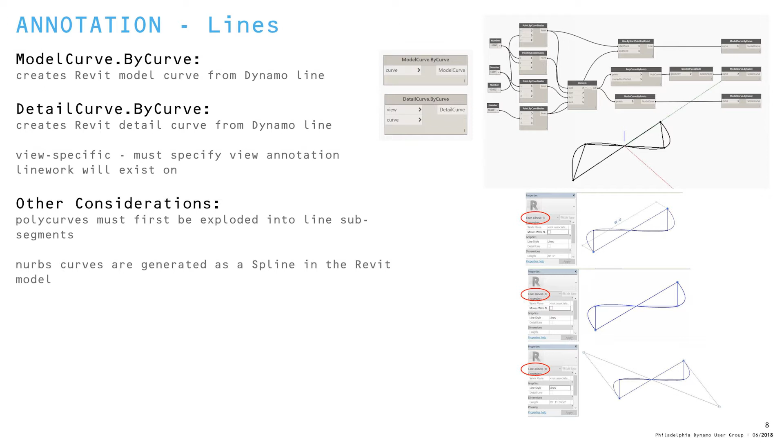Another thing is filled regions. Sometimes we want to drop a hatch or mark something up with a filled region, even though they're not the most intelligent elements in Revit. You can take Dynamo curves like a poly curve and then the perimeter lines of that and then establish a filled region in Revit.

One thing to note is these are view specific, so if you hover around here, you should be able to see. So you have to define the view that you're trying to put it in, up here. So I've done some kind of filter by Boolean mask and matching to get this level 2 floor plan. Otherwise, it won't be able to be placed because that's a view specific item.

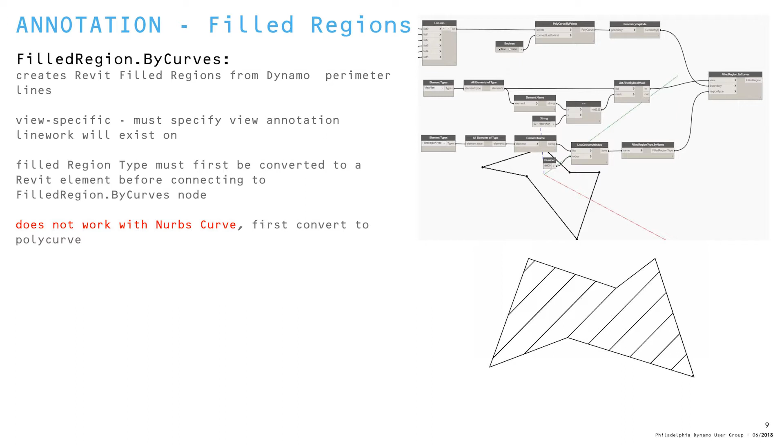It does not work with NURBS curves. That's one more point to note, is that you have to do the same kind of workflow or another workflow we're going to see in a minute about converting it to a poly curve so that Revit can understand it.

Another thing that you can do is place 3D components or families into Revit in any place. So I just took a simple example here and a point array and placed a bunch of trees. This one's really simple. I took a handful of nodes, obviously, but this could be helpful for placing furniture items and all kinds of different things.

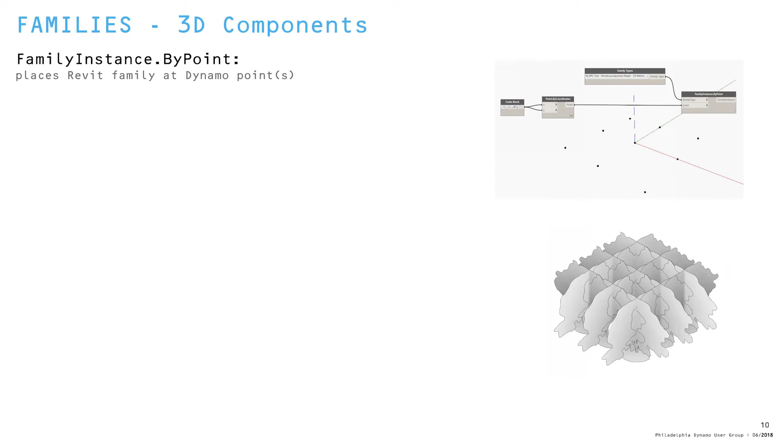Another one is hosted elements like doors and windows, even face-based or surface-based, ceiling, floor-based stuff as well can work. So what you have to essentially do is define a point that you want to place it on. In the workflow that you see here, I actually selected a Revit element. So I'd created a wall on the Revit side and then pulled that into Dynamo.

Up in the left corner of this workflow, one of my favorite ways of getting information from Revit is the select model element button, which I'm hovering over. That will pull in the actual element itself, and that's evidenced by the Revit element ID that pops up with it. However, if you share this file with somebody else or you open it at a later time or in a different model, it may not have that specific element ID, and it sure as heck won't match that same wall or whatever item you're querying from the model.

So I use our archi-lab select by element ID node, which allows me to bake in an element number. And in the future, if I switch models, let's say, I can select a new wall and feed in a different element ID number, and then it will select that every time. So that's a little more robust than the out-of-the-box select model element node.

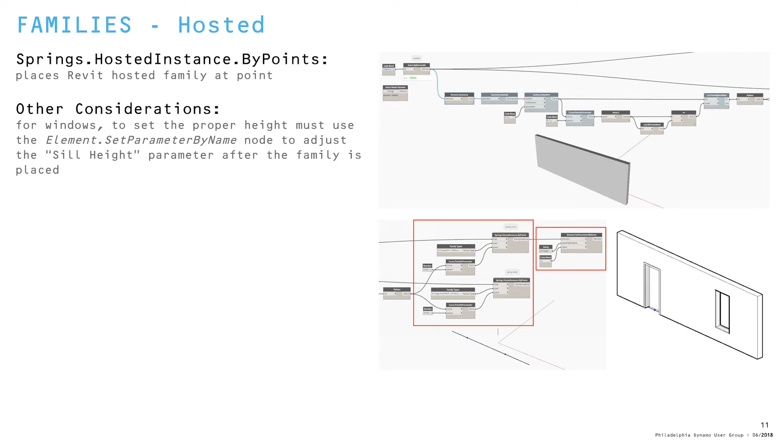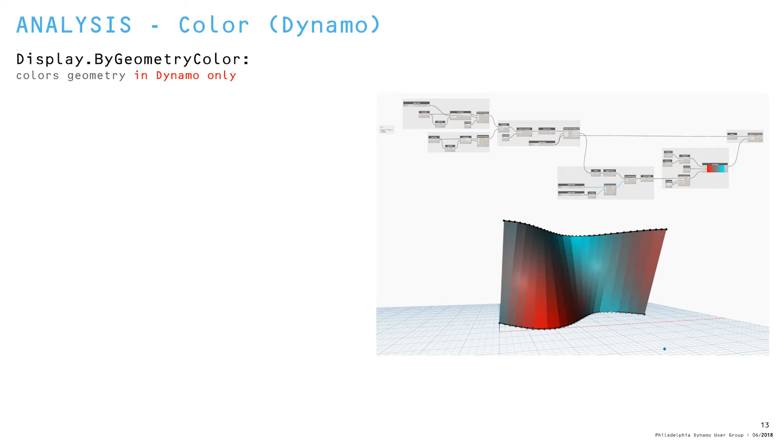On the Dynamo side, you can do some pretty neat things with color as far as analysis goes. This is geometry from a Dynamo workshop I taught at Dynamo-litia a couple years ago now. It's essentially just analyzing the perpendicular vector direction coming off the face of these panels on this wall. But this, using Display.ByGeometryColor, only shows in Dynamo. So that's only helpful for what you're doing on the Dynamo side. It doesn't actually get it to Revit. So how can we get color in Revit?

Using Element.OverrideColorInView, we can do a hack and override the color in the specific view we're looking at. In this case, I placed a bunch of generic family boxes in an array, and then colored them in that fashion. One thing to note is I have a little bit of logic going on here: I took the total count of items, and then using the remap range, I had to adjust for minimum and maximum color values and feed that into the color range node, which creates a spectrum, kind of a rainbow color, and then applies that over, let's see, 16 families here. So you can see that gradient shift over the course of all those shapes.

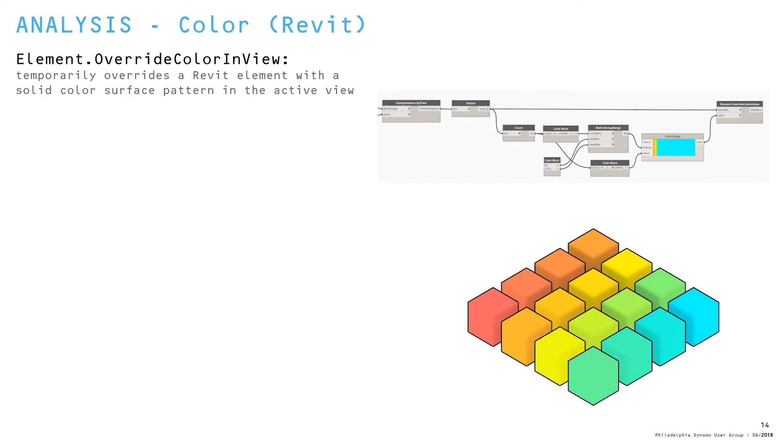Obviously, override color in view is a little bit of a hack at times. If you go into Revit, into plan, and right-click on any item, you can override it there. But it is a little bit tricky because it's not an ironclad way to alter something's characteristics or its visibility settings. And it makes it tough for a team member or yourself to figure out how that item got colored later. So that being said, there's another way to do it with materials.

You can use the same Element.SetParameterByName that we've seen with driving, say, dimensions of a certain family or object. But in this case, we're going to query an existing material from the Revit model. We're going to use Material.ByName and feed a string name into it, and it will create an actual Revit element that recognizes a preset material that I've created on the Revit side. In this case, I just named one red, put in the appearance values and all that, and then was able to drive that as a material parameter into the model and overwrite these families.

One thing to note is that I tried doing this on a material type parameter, and it was not happy. So it's important to make it an instance parameter so that it affects one family at a time, and then make sure you have all the families selected on the Dynamo side in order to color all of them the same. Or you can start to do something similar to the last workflow. All these colors would need to be pre-loaded into your Revit project in order to then match them up and drive them through Dynamo and SetParameterByName.

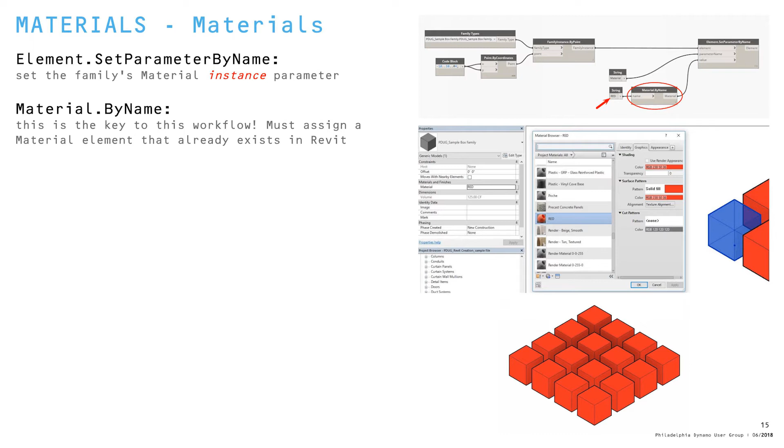So then looking at something like walls, pretty simple. The way walls are created in Revit is very similar to the way that you manually create them in the software. You click on a point and then drag a line and define what your wall is and set an offset height, and then that's what generates the element.

In this case, there's a tool called wall by curve and height. And if you have a Dynamo curve that you've created, so here we have 2 points and a simple line between the two, you can use the wall by curve and height node to set what the total height of that is, what your start level is, and the type of wall that you want, and it will generate that.

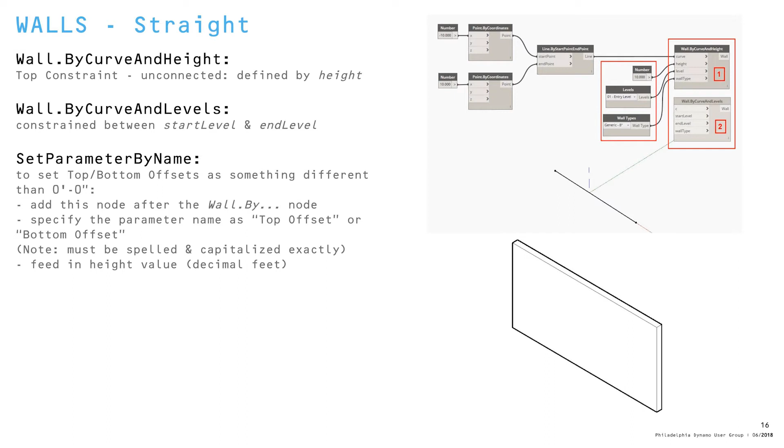There's also another node called wall by curve and levels, and the only difference with this one, instead of an unconstrained height, you can define 2 level inputs, and it will constrain that wall between, say, level 1 and level 2. Using the set parameter by name, it is helpful if you decide you want to change offsets of something. If you have a real specific, like a parapet wall at the top of a building or something, you can then make sure that it's constrained between 2 levels and then start to adjust the heights of the offsets for that upper and bottom portion.

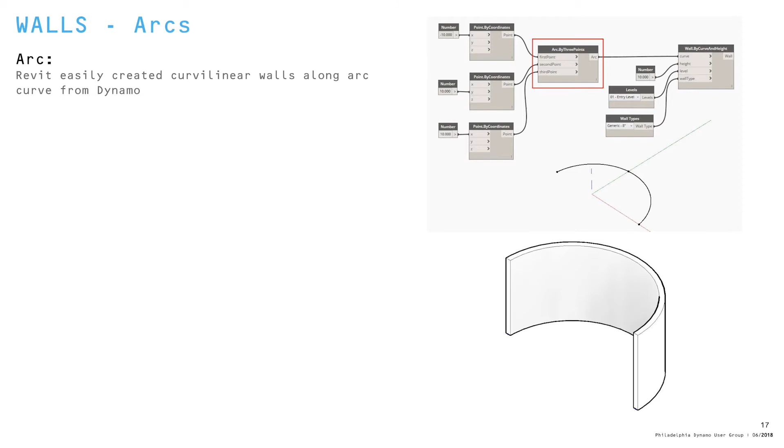You can also do arced walls. So what's nice is, you can create this on the Revit side, but it's interesting to be able to make curvilinear walls driven from Dynamo. So up here, we just have a simple arc by 3 points, and then it's feeding in the unconstrained height version of the wall by curve and height.

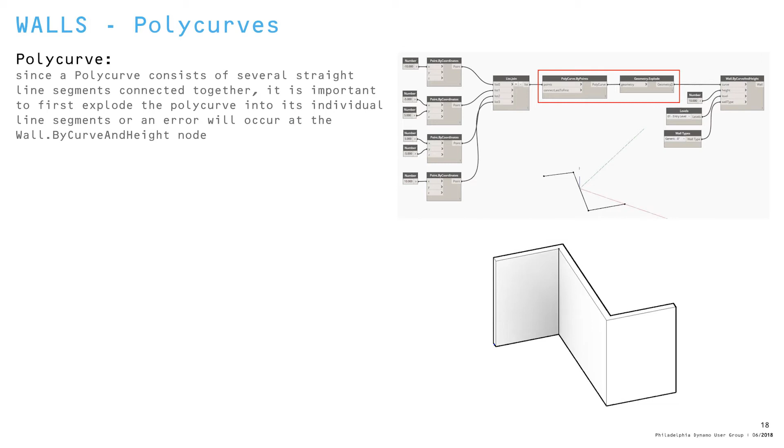You can also use polycurves. So just using some geometric logic here up in the example window, I was able to create a polycurve. It's kind of a Z. The key here is that you must explode the polycurve first. So these walls want to be created by individual line segments, not a series of joined line segments, which is what a polycurve is. So one step in between, I had to explode them, and then you could still give them the same wall by curve and height, unconstrained, define height, whatever, to get whatever shape you want, and they will join.

And then also, I took a shot at a NURBS curve wall. So I did not think this would work, and sure enough, it did not. However, there are ways to get a representation that's pretty close. And so you cannot create a spline on the Revit side, or a wall from a spline on the Revit side either. So that's just not going to happen, but you can with these smaller segments.

So what I do is, one of my favorite nodes is curve or surface point at parameter, in this case curve. What it allows you to do is feed in a sequence, in this case between the very start parameter, which is 0, and the very end, which is 1. You can define a number of segments along that line that you want to break it into. So here I have 10 segments if you count them off on screen, and it creates a new polycurve by connecting dot to dot to dot all the way to the end. And then I can explode that freshly created polycurve and use that to create my wall.

Obviously, visually, this isn't the smoothest thing. So there's a balance that can be struck between breaking this thing into more segments to make it look more curvilinear. If you have a handful of segments, it looks too rigid like this. If you have too many segments, it still may or may not look great. But also, if you get a million wall slivers, it gets a little difficult to manage because you're adding more geometry to Revit, and it's things that could potentially get moved or deleted or something like that. So keeping those elements together is important.

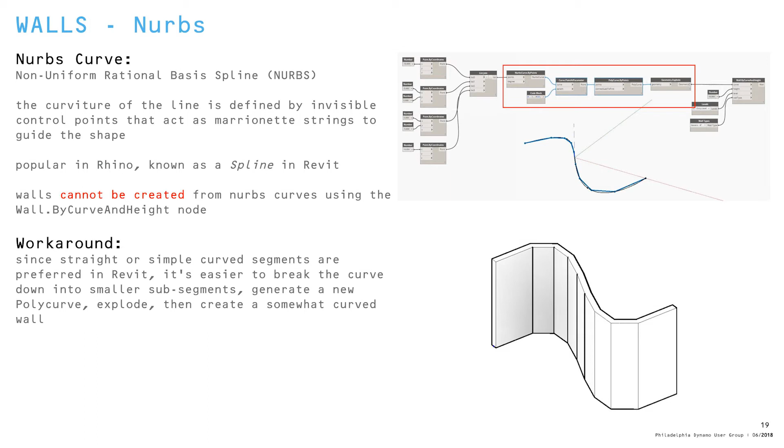Another option you have is to do wall by face. So this one's a little tricky because it depends on a Revit mass. So that's how the tool works in Revit itself, is you create a building massing, some sort of shape, and import that massing family into your Revit project.

One last note on that is one of my favorite ways to create kind of generic objects in Revit is using the Spring Nodes, Springs.FamilyInstance.ByGeometry. And what this allows you to do essentially, rather than an import instance or an SAT or some of the cruder ways of getting an element into Revit from Dynamo and other means, this allows you to actually use the Revit family templates that kind of come out of the box for generic models, special equipment, all kinds of different things.

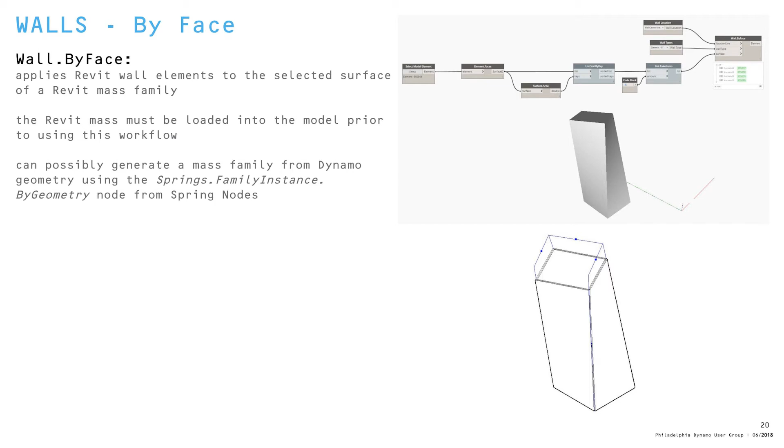So then I ventured into kind of floor territory. So similar to walls, floors are pretty simple. You get an outline curve and then just feed that into Floor.ByOutlineTypeAndLevel, defining what type of floor you want and the level it lives on.

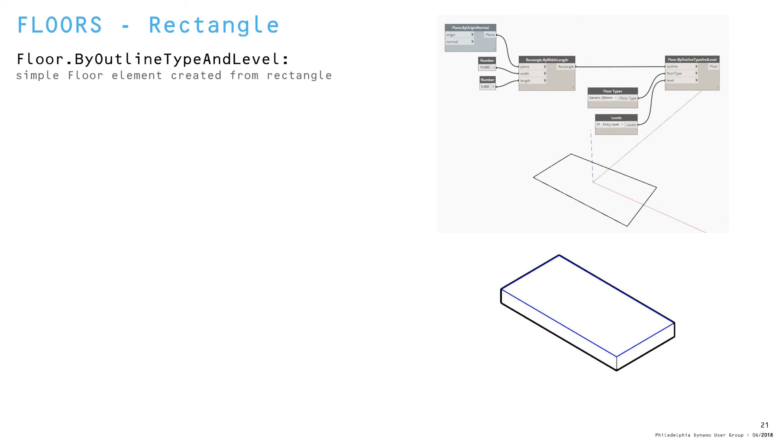To take it a step further, you can kind of pull in different individual curves. So say I chose a rectangle in this shape, but say you have a kind of wacky customized shape of some sort that you've been piecing together using Dynamo geometry logic. As a test, what I did was I joined the four sides of a rectangle, and then I shuffled their order to see if it would still be able to recognize and create that item.

And sure enough, with the individual curves in a shuffled order, it was still able to generate the floor. So it's not important that they're in sequential order. Probably a good idea as a practice because Dynamo often wants geometry to be in a nice kind of circular or ordered format in order to make its geometry. But if you're working on something that's getting a little out of control, but it still defines an enclosed shape, then you should be fine.

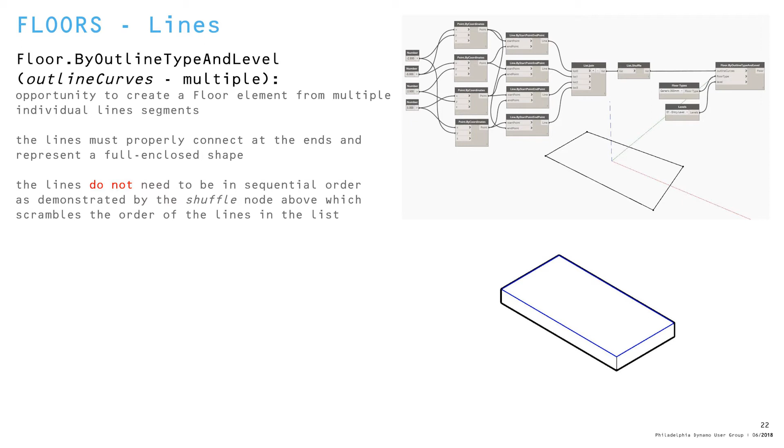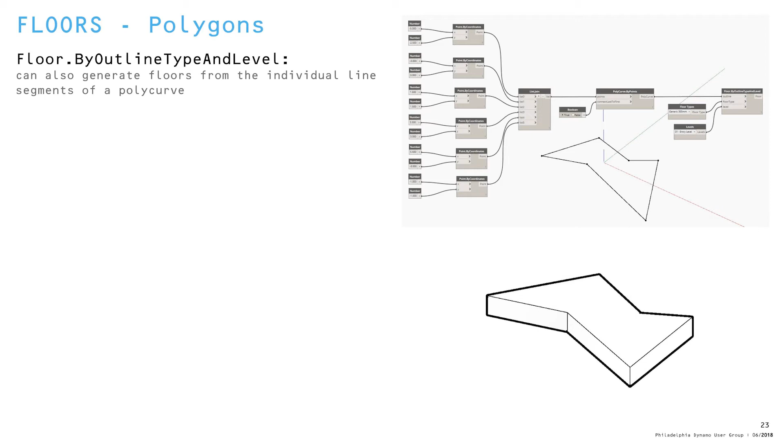Same goes for polygons. So I created this Z shape, whatever it is, with polygons, and then I was able to take that polycurve and feed it into Floor.ByOutlineTypeAndLevel, define the family type that it is, and then tell it what level it'd be on, and it made that shape.

Revit spline does not allow you to actually reconnect itself to the end. There's no snapping function in order to close that shape out. So no matter how many times you click and try to match it up or move it around, it just won't connect. It can be a little frustrating.

So the workaround for that is to actually leave it a little bit open, and you can draw a straight line segment to enclose that piece. And that will allow you to actually generate a floor in Revit, and that will work.

So a little bit about that background. I kind of just figured that out by messing around, but a little bit of background on why the Revit tools won't allow you to create a Revit floor from the spline is covered in Paul Wintour's Parametric Monkey blog that I found online. I thought it was absolutely fascinating, some of the limitations of that tool.

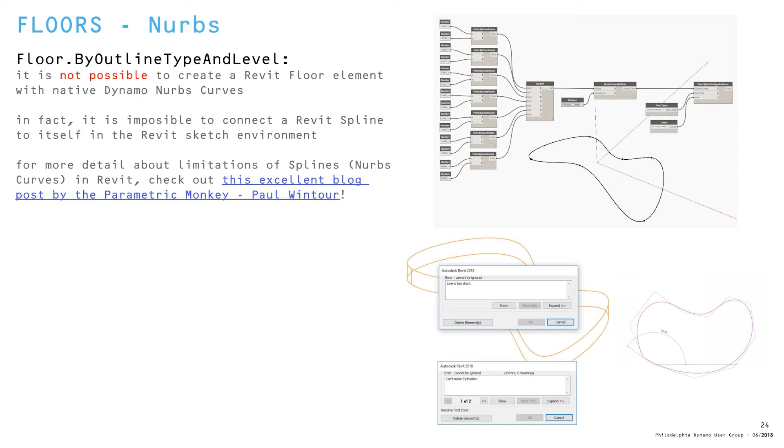So what I did on the Dynamo side was create a fully enclosed NURBS curve that I'm going to feed into a floor element, but in this case, just trim the end of this thing back a little bit so that I can enclose it by connecting a straight curve segment and actually make this all one enclosed shape. It's just not a true NURBS element. And once I did that, I was able to feed that into Dynamo, and sure enough, it worked.

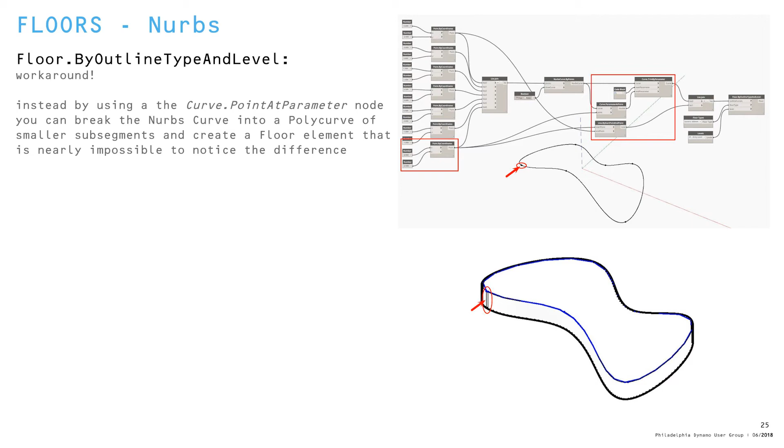And all you get is just one little blemish on whatever corner. So maybe you strategically try to hide that thing, but two little lines over the overall shape is pretty not noticeable. So then the next step, trying to take a crack at ceilings. This is something that I have tried many times in the past for different projects I've worked on.

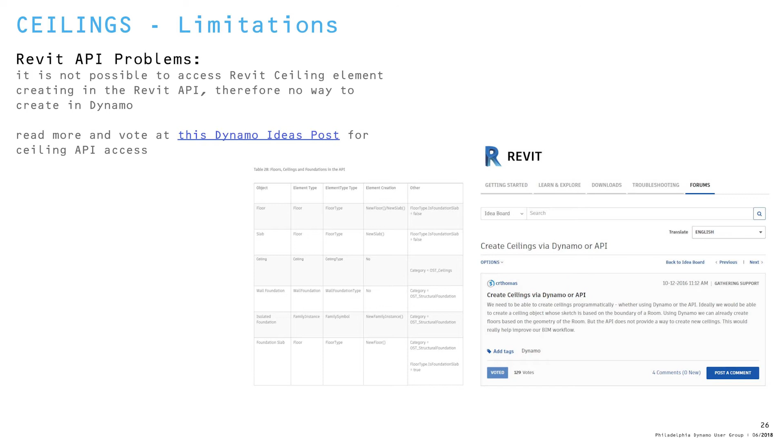With that being said, I have come up with two workarounds that allow you to circumvent that limitation. The first one was I just created the same poly curve that we were using earlier, and in this case I want to generate it as the ceiling instead of a floor. So using the Clockwork selection set by elements, you can actually import these curves in Dynamo as model curves in the Revit model.

The problem being that if you're on a project floor plan that's got a lot of stuff going on, a lot of annotation, you don't necessarily want to be importing curves into space and then potentially losing them. Or if it's a really complicated ceiling, there could be a lot of lines going every which way and adding model size. So the selection set tool, if you're unfamiliar, is something that I think is rarely used.

What it allows you to do is select a bunch of things in your view and save them to what's called a selection set. It's basically storing the element IDs of those items in Revit so that you can go back to the menu, I think it's under the Manage tab, open up the selection set menu and reload those elements again. So this Clockwork node is extremely handy to, immediately after those model curves are instantiated in Revit, wrap them up into a selection set that can be recalled.

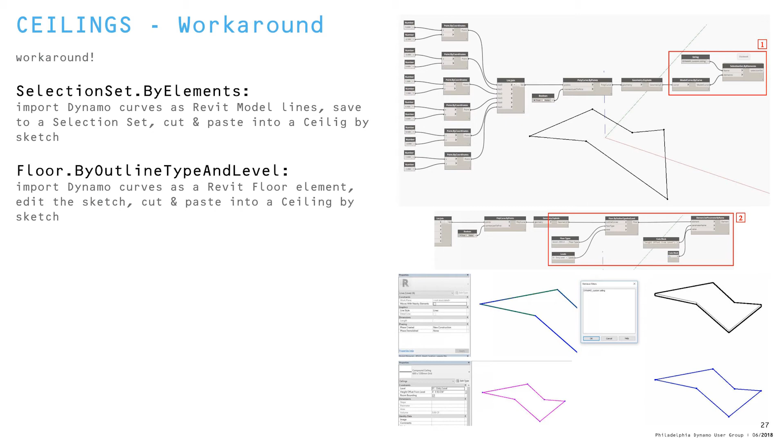Placing rooms is also something you can do in Dynamo. It's dependent on room bounding objects, otherwise it will just go in unplaced and run off anywhere. So if you do not have wall elements actually defining and bounding the room, you could create room separators by curve, another fantastic Clockwork node that allows you to generate a shape based on Dynamo curves, and then that goes into the model.

And the last step is Room by Location, a node for placing a room at whatever level you want; the origin point defines the location, and then you just give it a name and a number value.

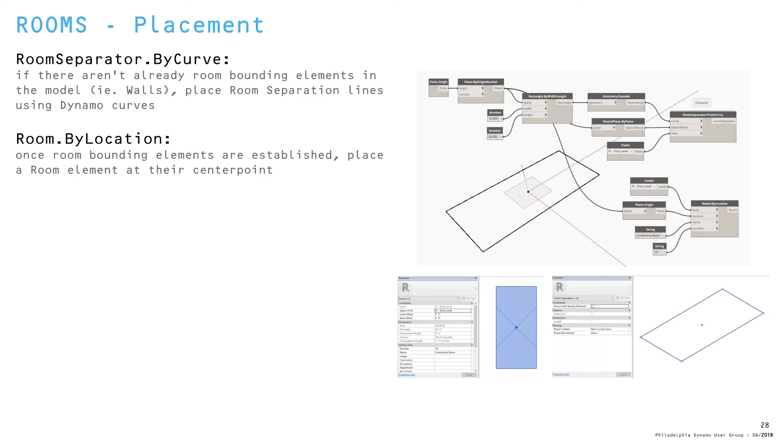Another workflow that is pretty handy is creating curtain walls. So this workflow is the same as just the basic wall creation task, where you're defining an underlying curve and the height of something, and you're creating a wall type, which happens to be a curtain wall. Where it gets tricky is that oftentimes we want to define the spacing and some of the information surrounding that actual Revit curtain wall item.

Another way is to actually duplicate and create a fresh curtain wall type that does not have any grids in it. It's just simply the frame, and maybe it has one panel placed in it to kind of populate the center, but it's a blank slate. If we use Dynamo to create a wall by curve and height and define this new type in there, it will just generate, based on the surface, a new curtain wall.

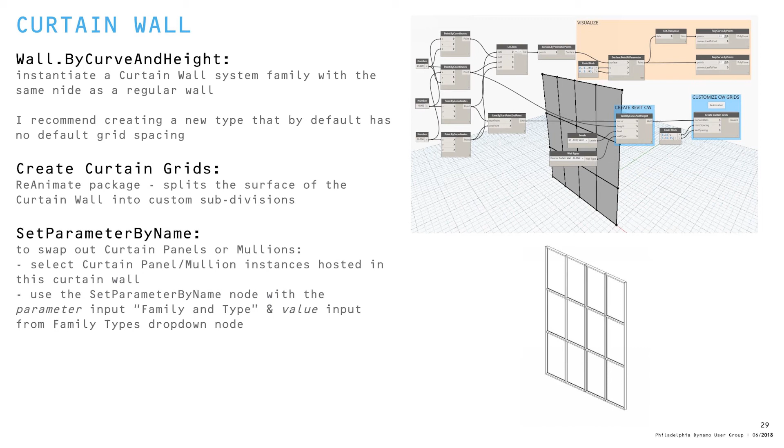If you want to get into different panel swapping for vision glass versus spandrel or metal panel, maybe infill items, or even different color glasses or different colored treatments, you can get pretty custom in curtain wall land by generating the overall shape with Dynamo and then driving how the grids are splitting inside of that.

Another workflow that I've done for creating some wilder shapes is using the structural framing by beam by curve node in Dynamo. So what this is essentially doing is taking a structural framing element, like a Revit structural beam family, and then it defines it on a curve inside of Revit.

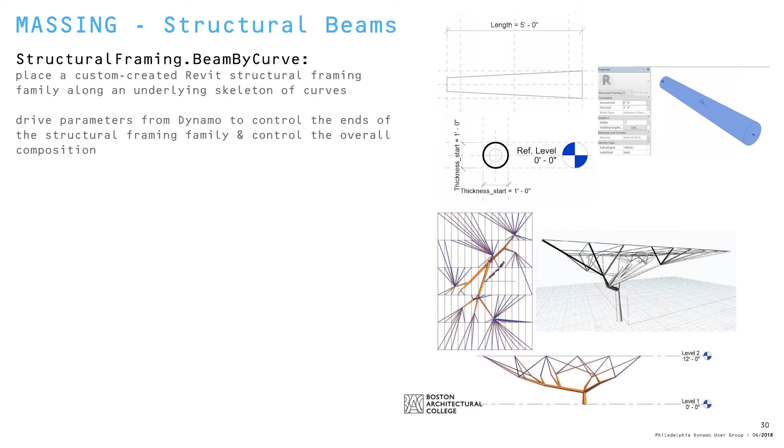Adaptive components are a pretty popular means for creating complex facade surfaces in Dynamo, and also just in the Revit environment they can be pretty handy for making some complex shapes. You are also able to really deconstruct any Dynamo surface or Dynamo object down to its underlying point structure of your choosing, and then use that to drive adaptive components. So you can get a little bit more added control and adaptation to bespoke geometry that you create on the Dynamo side.

The key to this is some serious list management. And list management is essentially reordering the way that things occur in lists and sublists throughout Dynamo in order to really define the way that a particular geometry is created, or the way that data is structured in order to meet a specific end goal.

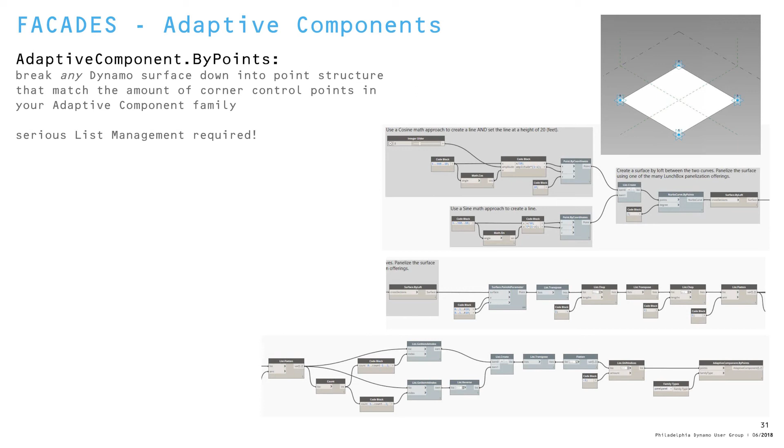And what we get here is when we use this AdaptiveComponent.ByPoints node in Dynamo and define what panel we want to use, it actually populates the adaptive component along that surface. And if I click on one, you can see the points there applied. If I did not have it in that order, it would not be happy and not work. So it's really critical to match the same sequence.

Using the same kind of workflow, you can also apply this along trimmed surfaces, whether a surface is trimmed on the Revit side, or you have a bespoke surface of any shape that may not be orthogonal. This point-at-parameter approach in Dynamo likes orthogonal shapes, so it can evenly divide them up as much as possible. In this case, we have a corner bitten out of this curvilinear surface, so it was really important to establish a logic and accurate counts for what conditions are along this curve.

If we're starting automatically with squares and 4 points, sometimes you end up with 3 instead, and there are places where you end up with 5 as well. So in this case, you would need to modify an adaptive component to account for 3 items, a triangle, and then 5 items, a sort of 5-sided polygon. Once you have that, you can divide these into separate lists. Remember that logic is important, what corner you're starting with and how you're moving around the edges of that adaptive, and then drive that into Revit and populate your surface.

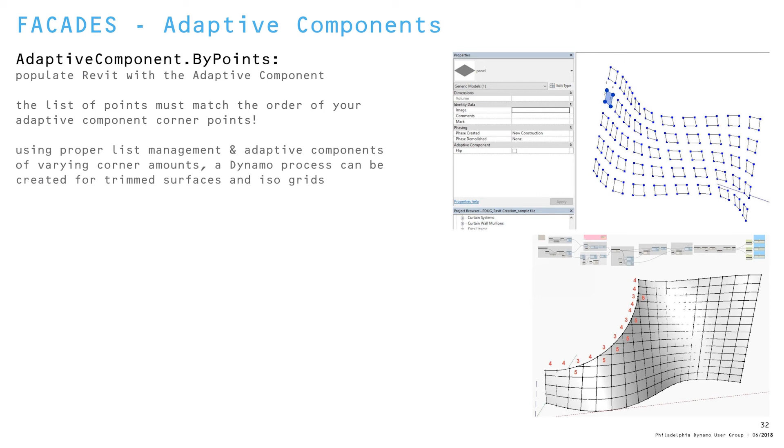So all of these things that I've shown today are ultimately striving for a better Revit experience. Like the question stated in the beginning: how do I make this Revit? How do I get these things to show up? I've spent all this time making this computational design, how can I start to populate Revit elements that would inform my project? And I think that Dynamo is the key to be able to connect between these platforms and automate or optimize some of the workflows for creation.

One thing to consider with interoperability, whether that is generating something from Dynamo geometry, or feeding something in from third-party platforms like Rhino, SketchUp, CAD, all these other softwares that we use in our daily workflows, is that generating elements in Revit is just like learning a new language. So you can't just say, I speak English and I'm just going to talk louder at you to get you to understand me and do what I want.

In this case, it's like the difference between Spanish and Chinese, let's say. It's very different language and set structures and characters. And so Dynamo is that kind of connector between those two worlds and the translator between those languages. But we have to have a base understanding of both of those platforms and those languages in order to be able to define what we're trying to say.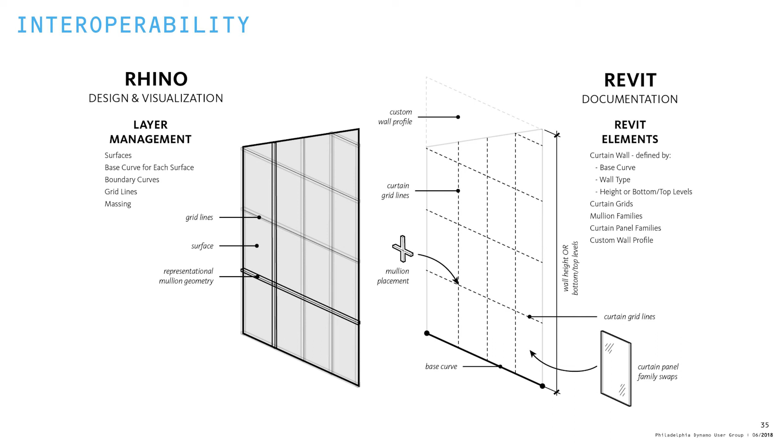This diagram is something that I created to try to better describe the interoperability workflow for a design project between Rhino and Revit. These are probably some of the most popular tools, Rhino on the design side for driving shape and form and visualization and diagramming. Revit on the production side for starting to establish some of the hardline items like building grids and actual elements and wall thicknesses and details, and annotated floor plans and printing.

So it's oftentimes really desirable to establish some sort of workflow between these two programs. And that can be done with a combination of Dynamo and Grasshopper with Excel as an intermediary. So a good start, or just a general workflow, could be if you have basic grid and structural grid information, whether it's a new building or an existing one, you can start to establish Revit grids on the Revit side, as well as level heights and some of that information.

Once you have that created, you can get that information out using Dynamo and feed that into a basic Excel file that describes the start points and end points of geometry. It describes the XYZ location of those points and the width and spacing of the grid elements, as well as level heights themselves.

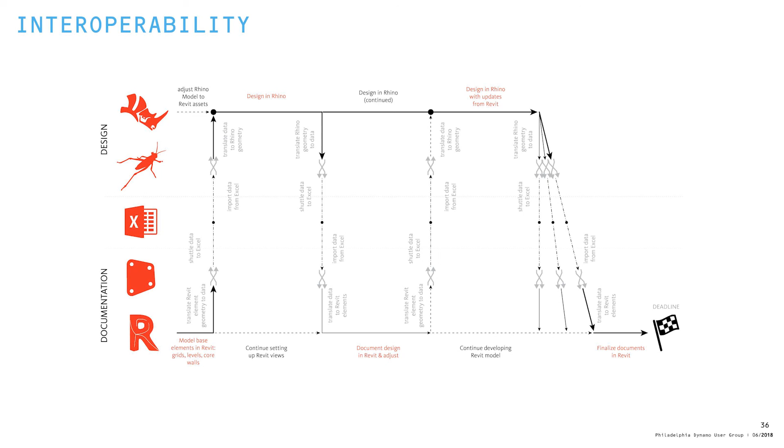One caveat to this process is on the Dynamo side, you have custom packages like Rhynamo by Nate Miller's Proving Ground, as well as Mantis Shrimp by archi-lab and Konrad Sobon, that allow you to actually convert Rhino geometry without this interoperability need for Grasshopper. What Grasshopper does get you is the ability to convert data back into Rhino, but those also can somewhat be generated using those two custom packages for Dynamo.

So one more point I wanted to touch on was this concept of data serialization, which is a key component of this interoperability workflow we just covered. Data serialization is the process of actually converting geometric elements into their purest form, into just numbers that describe their overall coordinates. So we could break a panelized surface, let's say, into the actual corner points that are driving those panels, and those coordinate points have an XYZ coordinate in Cartesian space.

So if we can capture that into a list of XYZ coordinates in a formalized structure of data, that structure then can be reverse engineered in other software formats. In this case, if we're feeding things in through text file, CSV, JSON, all these different data formats, through Dynamo, deconstructing it and then reverse engineering it into Dynamo geometry, we now have the basis for being able to convert all kinds of geometry formats into Revit elements themselves.